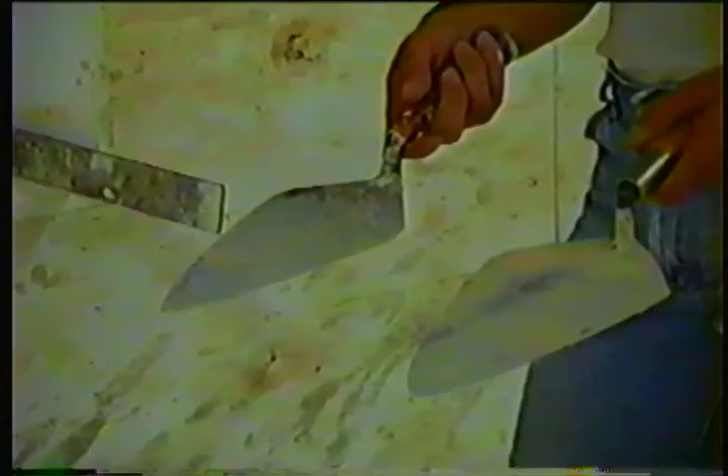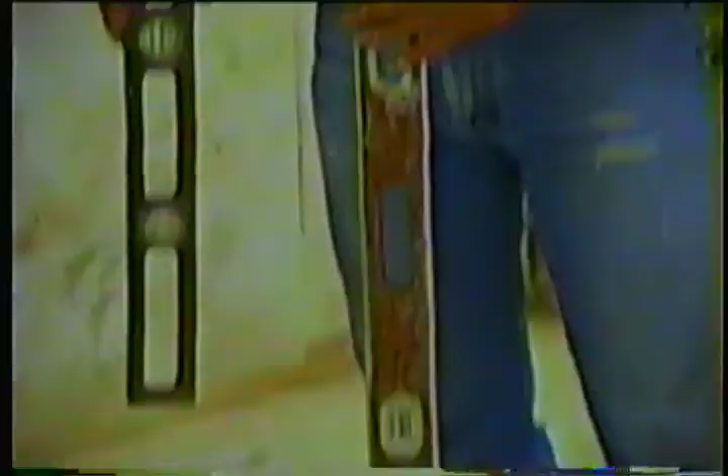We got two trowels. Usually the small trowels are for brick piers, and the big trowels are for blocks. With big blocks, we got to spread a lot of mortar. The next tool will be levels. We have two levels. We have a 2-foot level for small piers, and the 4-foot level will be for corners, block corners. There's a 4-footer, and in his right hand is his 2-footer. In the level is something like alcohol, so it doesn't freeze in the winter time.

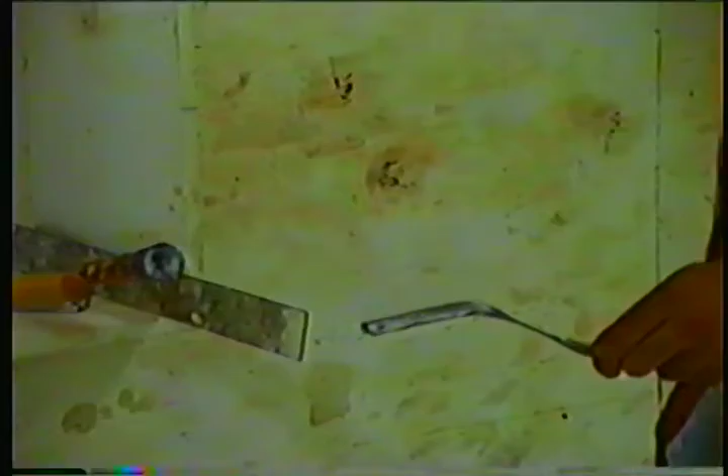The next thing we're going to use is a jointer. This is the basic tool that you should have when you come to the first year. We got a concave jointer. Usually the jointer is used not only to make the cement tight against the brick, but it also waterproofs the brick wall. There's no porous holes in it.

The next one is the rule. Usually every course is 8 inches. That's the modular thing today, 8 inches per course. And of course the bricklayer hammer. This happens to be a smaller hammer, but they have bigger ones.

Okay. And then we have the chisel, or a bolster. Usually it's 4 inches wide, for cutting blocks and brick. It's a very handy tool to have. In fact, you have to have it. And the square: someone would just give you a piece of job to do and say, hey, square that off. Must have a square, which is critical.

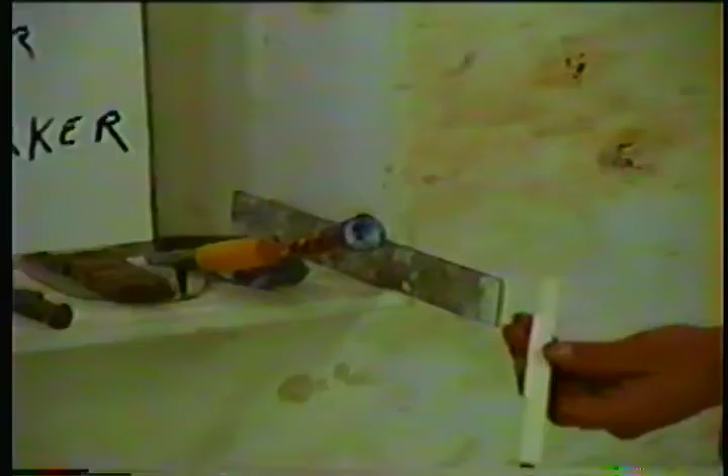And of course, the pencil and the marker. It's good to have a pencil because the foreman says, hey, put a mark on that wall. You ain't going to say to the foreman, do you have a pencil? You got to have a pencil, okay? But that's the basic procedure. Trowel, 2 trowels, levels, jointers, rule, hammer, chisel, square, and a pencil or some kind of marker.

Again, we're going to show you what you're going to do the first year. We'll put you up on a piece of plywood, and you go spread mortar. Okay, Jay. There's a trick to it. Compact the mortar on the trowel so it's nice and compact, and spread. This is a very fancy knack. You can't learn this overnight. It takes a couple of days.

Like I was saying before, that plywood is 4 by 4, 4 feet by 4 feet. You can spread the whole plywood. You're doing pretty good. I bet you if he grabs the big trowel, he might be able to spread the whole 4 foot. Just constantly doing it over again. Compact the mortar, keep the mortar uniform.

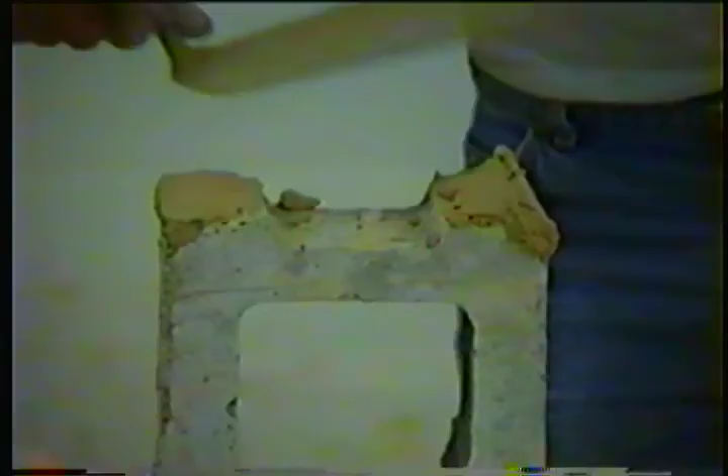See how he pressed that down like that? That's beautiful. Then when he picks up the block, that's beautiful. Look at that. Now when he picks that block up, there's no problem there about that mortar falling off.

Years ago, the old-time bricklayers, they used to pile that ear up so bad it was pathetic. But they wanted full cross joints. Well, we're giving full cross joints here too.

Take your time. See how we cut that down? A couple more times, Jay, then we'll show them how to do 2 ears at once. Save a trip. Every time, every little move means a lot. Every time you got to make a move, you go back to that tub, you're bending over, you're wasting moves.

Now we'll take that off and try it once more, Jay. Look at that. One shot there, one shot there. And compacts it so it don't fall off. Okay, now if you learn that pretty good, Jay's going to proceed now to get enough cement on his trowel. The main thing about learning how to do this is the right amount of cement on the trowel. Not too little and not too much.

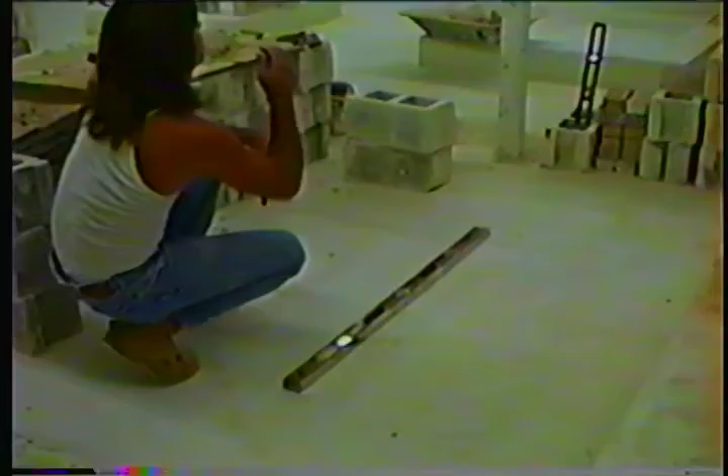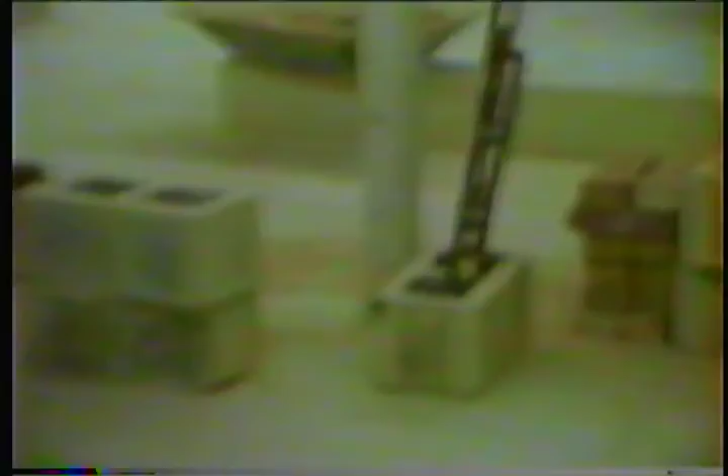Okay, buddy. Now what we're going to do, we're going to make a little pyramid type wall out of 8-inch blocks. Jay has took his level. He's going to put a mark down on the floor. Make it nice and thick. And then he's going to start laying blocks. Notice, fellas, how he put his levels in the block. If you ever had a contest and the judge comes around and sees you with levels on the floor, that's not a very smart move. Always keep your levels in the blocks.

Okay, put the mark down, the pencil mark. Let's see if I can pick that up. And he doesn't put the cement on that mark. He keeps that mark visible at all times. Puts the block down, he's going to level it. Then he's going to plumb it. He's going to plumb it, right? Okay. No. Plumb it up first, and then we get the height. Plumb it up nice.

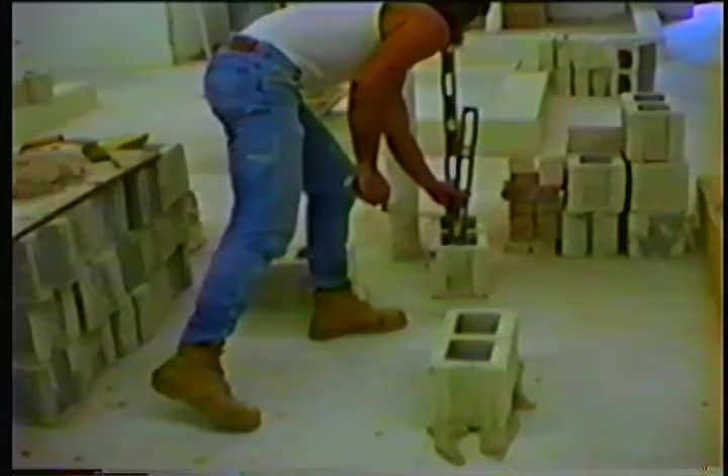Usually they plumb the face of the block, because some of these blocks, or units, whatever you want to call them, they're not perfectly square. But being that he's working on the face of the wall, it's facing him, he plumbs that face of that block. Now you can take the height, Joe. Get the 8 inches from the end, and that's where you take the height all the time, from the end of that block.

Second block. First block is level, plumb. He has his 8 inches. If you notice, we can still see that line. He did not put any mortar on the line. What's the use of putting down the line if you go spread mortar all over it? Sometimes you go on a job and the foreman has a line down already. He says, hey, start laying out these blocks. You don't want to start throwing mortar on the line. My goodness, you do that, you lose the line. Wall look like a banana. You don't want that.

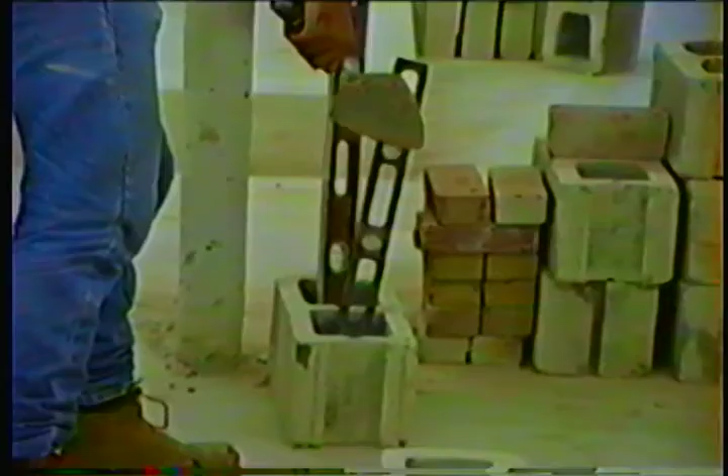Okay, I would use the small level to plumb. Okay, buddy? Always use the small level. It's easier to handle. Does a much better job.

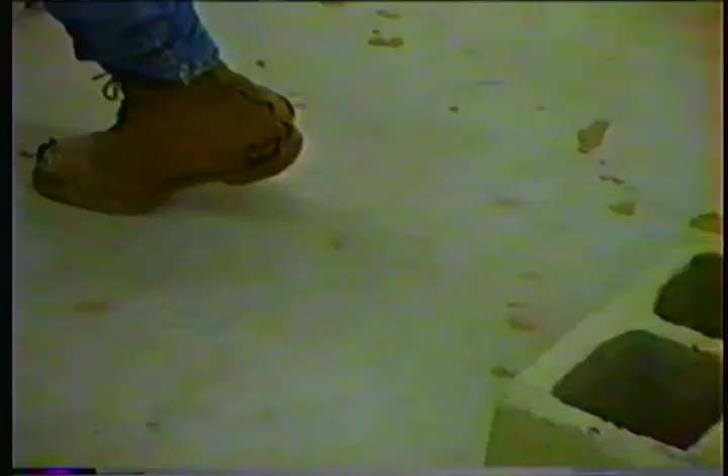By the way, Jay just came to school a couple weeks ago, and he's doing very, very good. Very good. I'm very proud of him. I have hopes for him at a contest in Atlantic City. And by the way, this school always came in the running at a contest. We have good instructors. We have Miss Dione, director of the school, Artie Torrey from Local 13, one hell of an instructor. My partner, Leroy Wilson, you'll see him on tapes later. He's a mathematic genius who shows how to do fractions later on, which is very important for the first year.

Wait, Kai, you want to cut that for a minute? Okay.

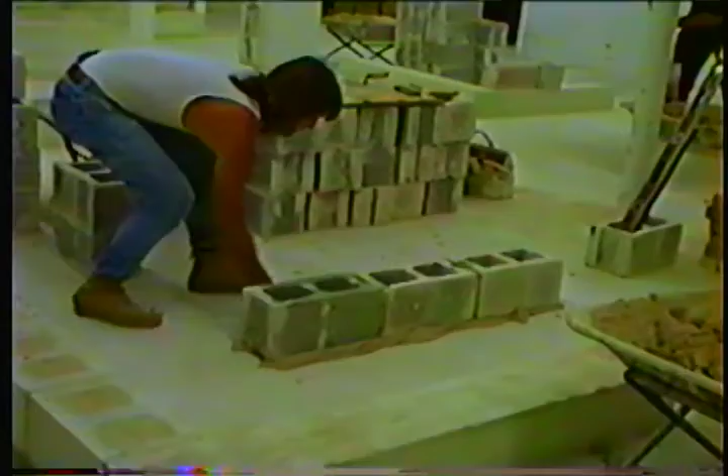You notice, people, Jay is in no hurry to do this project. He is taking his time, and there's no rush. Speed comes automatically. If you think you're going to come into school and do a lot of work real fast, forget about it. You must do it right. Speed comes automatically.

Leveled it. Puts the levels right back in that block again. Comes that block. He ranges them. And fellas, ranging the block is just as important as plumbing it and leveling it. To get that range so all them blocks get flush. And by golly, you look close, you can still see the line on the bottom. Yeah, 7 3/4 from the end.

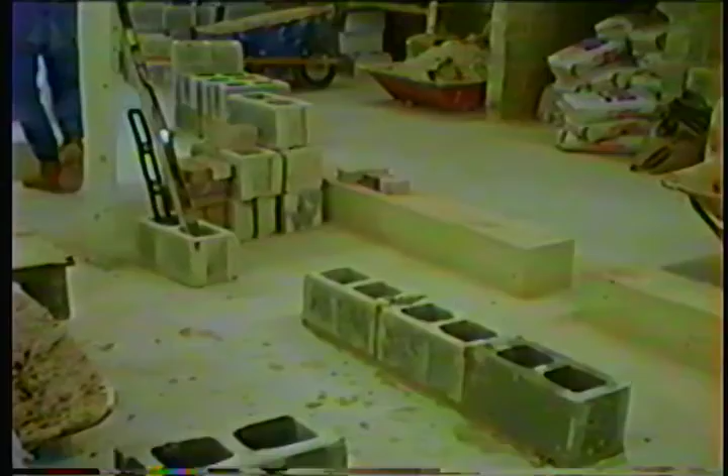Now with these units, blocks are 15 and a half, 15 and 5/8. We're taking the center of that 15 and a half, we're measuring in 7 3/4. 7 3/4 is half of that block. That's what they call half bond. All your bonds, your Flemish bond, your Dutch bond, your stretcher bond, header courses, will come in the second and third year. All we're doing is trying to concentrate on the first year apprentices.

There's all types of brickwork, there's glass block, PG tile.

This is a high-class video. We have a laser here. Never done pretty good without a laser.

So he's getting his mortar just right. If the mortar is too wet or too stiff, forget about it. The mortar has to be just right. If they start mixing up, it becomes too wet, and they can't gain the height. Some of them make it too stiff, they're too high. We'll proceed again, spreading that mortar. Well, you didn't lose too much that time, that's great.

Of course, here we can bend down and pick the mortar up. We're working up 10 stories in the air. You drop that mortar, forget about it. Just putting that block, the second course, right on that mark. 7 3/4 in. That second course would be half bond.

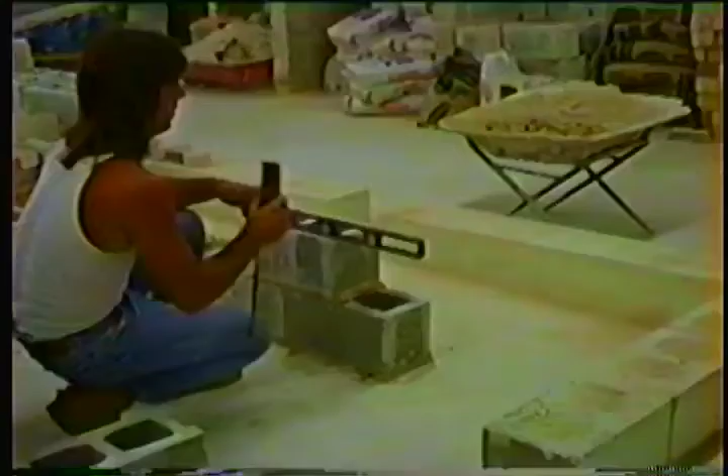Jay, where he wants it, just go. I want you to actually start over there then, right? He's got the height within reason, right, Jay? Yep. Good. 16, right? 16. You got it, buddy.

By the way, Jay is donating his time to come here tonight. I certainly appreciate it. Slept a little bit early before the class came in.

Gotta have a touch for this, fellas. You gotta have a touch for it. It's not easy, okay? It's not easy. You notice that level is facing right on the end. It's not outside or in the middle. It's right facing him on that side, which will be his face work. If you look at the wall, you're going to see the face work. You're not going to see the back of the wall. You're going to see the face of the wall.

On that side up, on the other side up. And range it again. Range it to the other part when you get done. You plumb both ends. You don't have to plumb the middle, just the ends and range it. Now he's checking with the first course, ranging it. Ranging it is very important.

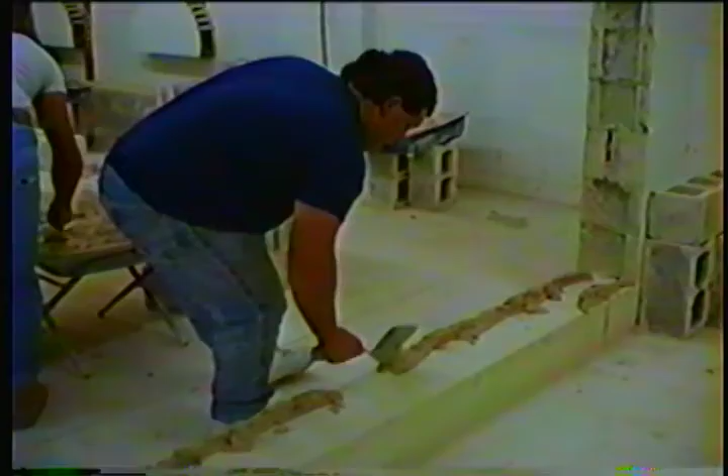So what they're going to do is spread the whole wall, and then they'll start laying blocks together. This procedure is to show you how you work together on the wall. And you notice what a nice job Al's doing. He's not spilling the mortar. Al just started here, about 500 hours, doing great. Again, we'll show you how two men work on the block together.

Jason's setting the blocks. Real fine job. Now, buttering the ears up, helping Jason set the block in the wall. Now, these are 8-inch blocks, so there's usually one man per block on the course. But we're showing you, like if you have 12-inch blocks or 18-inch blocks, quite big today, there's always two men on the block. Again, Al has got his block all set up, and Jason's ready to lay that block. Okay?

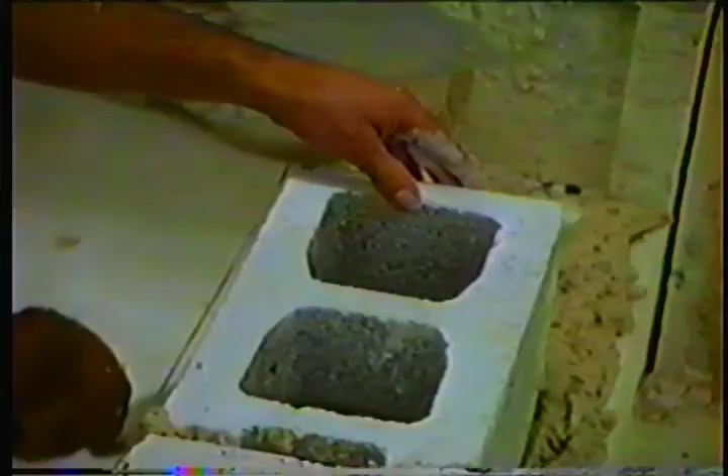Well, Al is getting ready for the other block. Jason's setting that right to the line. Always leave a little space between the line and the block. This way here, you won't crowd the line. There's always supposed to be a thickness of a trowel between the line and the block. Setting up the next block.

Now after one course of blocks are all laid there, we'll proceed to put the line up when he sets this block. Jason raised his line up, and they'll proceed to spread the mortar again.

The mortar should be just tempered right. If it's too wet, it's no good, especially for blocks. The right consistency makes a good bricklayer. Too wet is no good. And too stiff, of course, is no good neither. This seems to be a nice batch of mortar. Spread this line out, and let's proceed to lay the second course.

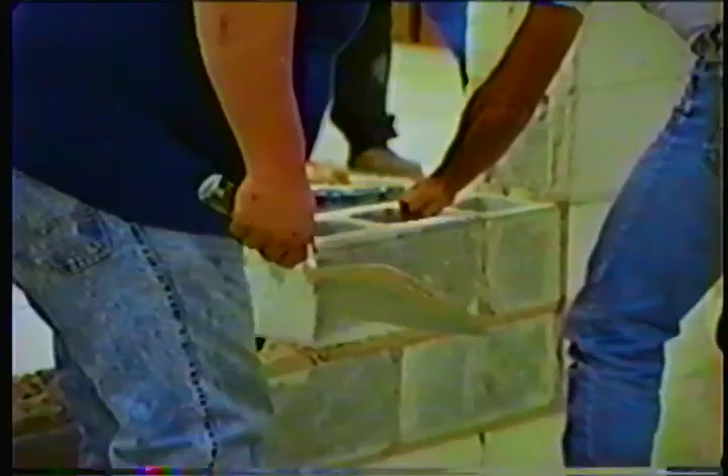Finishing spreading that wall, Jason's already getting ready for the other half. Second course will be a half on it, and while he's doing that, Al will set up another block. Just like clockwork here. No wasted motion. Jason is keeping the block away from the line, about the thickness of the trowel.

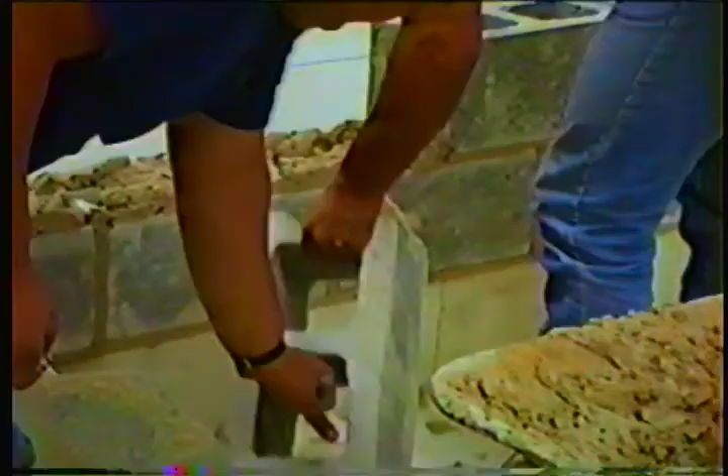It seems every bricklayer knows every move. They don't have to talk. If they want to talk, they can talk, but they haven't said a word. Every bricklayer knows his own move.

Remember earlier we taught you how to butter the ears of the block? Well, instead of doing one ear at a time, Al is pretty good. He's doing 2 ears at once. It wastes, but they save a lot of motion and back bending. The tricks of the trade is to make it easy on yourself. The less bending you do, the easier it's going to be on your back.

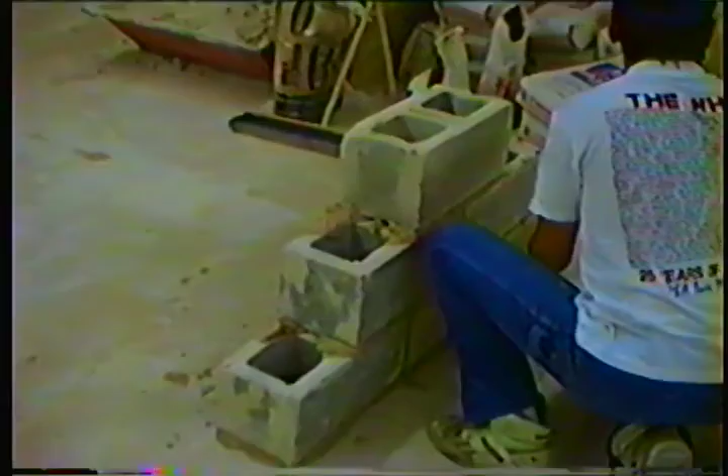Putting another half in, I'll switch around to show you what the other fellows are doing in the class this evening. He's still on the pyramid, he's trying to get it perfect. Practice makes perfect. He'll be a good bricklayer. Jimmy is more experienced than the other fellas, and I put Pat on a 4-inch corner wall, 4-inch block wall in the corner. Little tricky. God bless you there. You got to start over about an 11.5-inch piece.

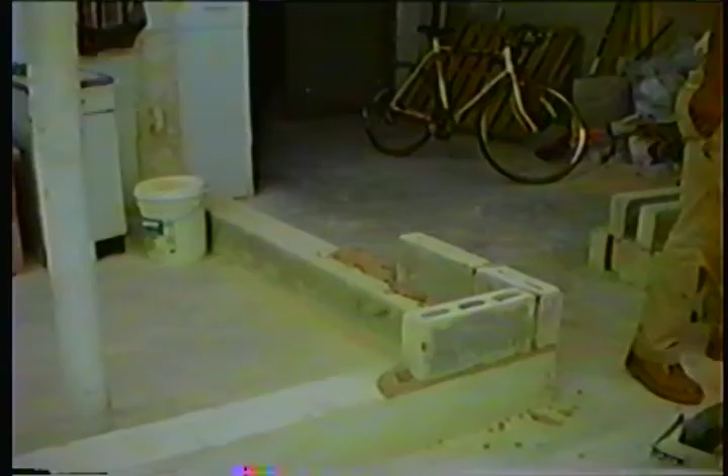Pat just started a couple weeks ago. He's doing great. Now we get somebody else. Again, Mark is putting the line on the right. The man on the right always pulls the line. A little more mortar mix, and Mark and Jason will lay the other course.

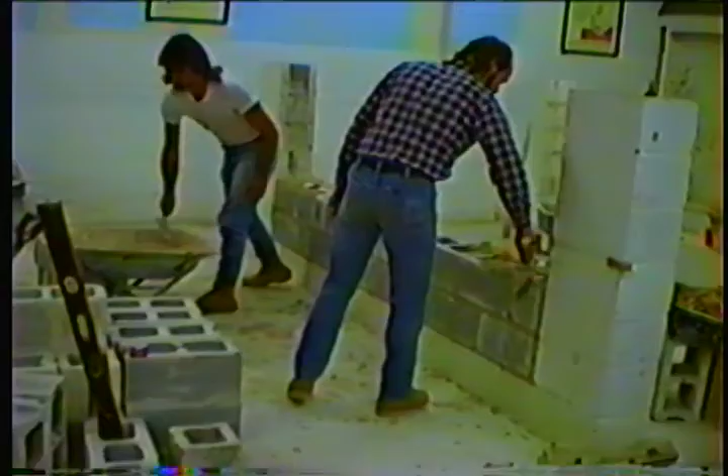Now we'll take a break. Mark and Jason get done with this whole course. We're going to have Mark and Al run up a short corner here. Two men can work on the corner as well as on the line, especially 12-inch blocks. We don't have any 12-inch blocks, so we're just making out that they're 12. The idea is to show you how two men can work together with no confusion, that's the word I was looking for, confusion. Again, Mark spreads on his side, Jason spreads on his side, they come together, and they start laying blocks.

Got the line up. Don't even touch that line. Don't even touch that line. A few weeks ago, trying to get that pyramid through. Practice makes perfect. Again, Mark is driving this time. Mark's on the right, Jason on the left. Mark has been a journeyman about 5, 6, 7 years already. Jason's been laying brick about 4, 5, 6 months, whatever.

This is the first time I handled a video, so I hope it turns out good. Probably need a little more practice in video.

Again, Mark Bassinger is from local 18, and Jason Marino is from local 13. Jason's cleaning up the cement on the floor. So I told you before, fellas, always keep your area nice and clean. If you're at a contest, they don't like mortar all over the floor. The judges. Manipulation of tools. It's all around.

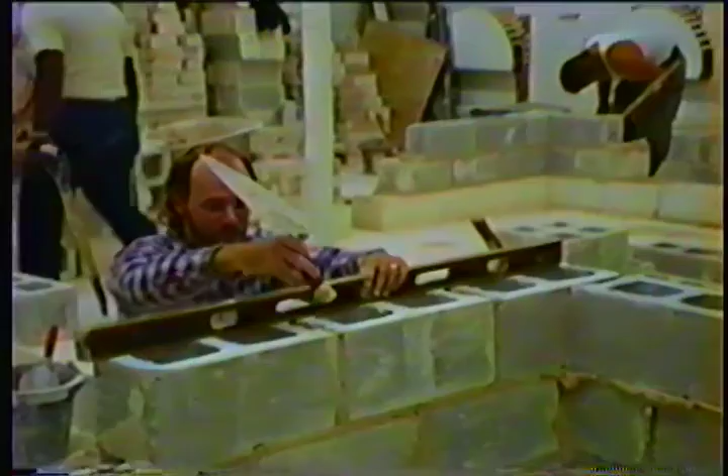Tricks of the trade. Pretty good looking guy, you know me? Look at me. We lie a little bit here, you know. Make it a little bit happy. Make it happy.

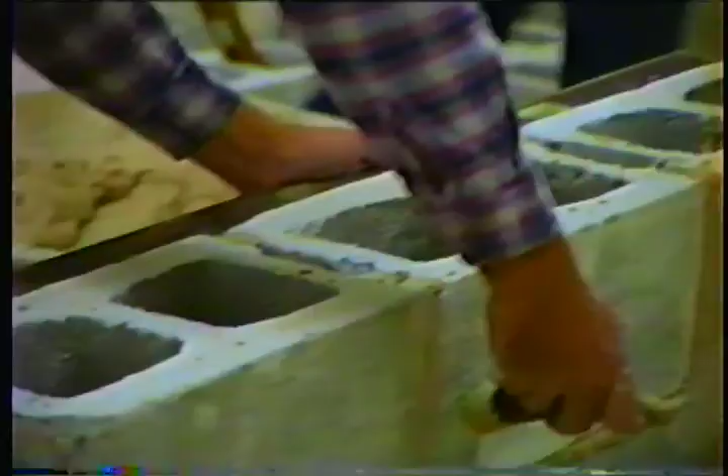The wall is nice and level. Plumbing the corner, the lead, plumbing the lead. When you plumb the lead, you plumb the corner before you go range it, like you're doing now. Always hold the level up in the air, up on top of the block. That's the true grip right there. Okay? Working real good.

Again, Al is leveling his blocks from the corner. I guess he's setting up on Mark. Boy, that's all right. He wants it right. Nothing wrong with that. Then you go range it. Start spreading out for the other course.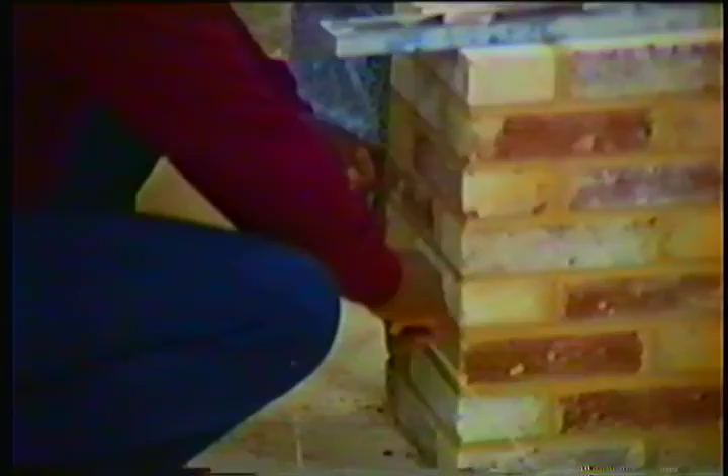Remember, the man on the right always pulls the line. The man on the right always pulls it tight too. Anthony, real tight on the first course. Make it tight. You have about a 60 to 70 pound thrust on that line. I want it real tight. Pulls the line. Hey, quiet on the noise. There's about a 60 pound thrust on that line.

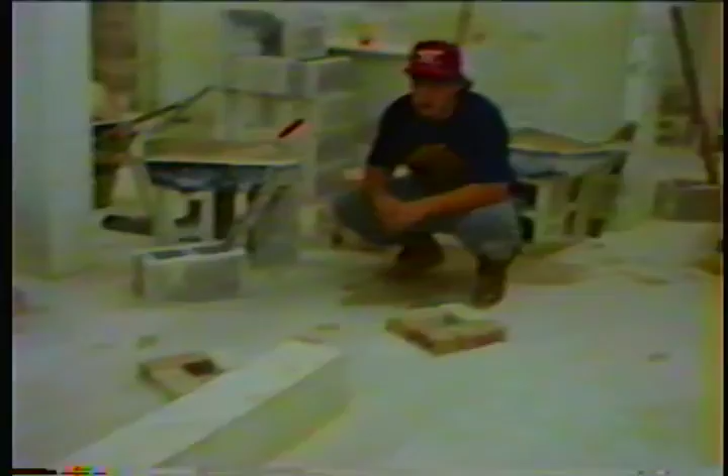Tyrone, you got a line trig? All right. After the line is up, we go set the trig. Patty, you go set the trig for us, okay, buddy? The line is up. The man on the right pulls the line. The trig man will set the trig. After the trig is set, then bricklayers, we lay brick. We do not lay brick until the trig is set. We leveled off the brick, and that should be just level right there. Pat will set the trig, and it's called a trig, people, not a twig. As soon as that trig is set, bricklayers, start laying brick, okay?

Now, let me explain something as we go along here. Start laying brick, Tyrone. I'm going to tell you right now, I'm going to start yelling. I want it done right. Start laying. Do not touch the line. We have 2, 3, 4, 5 people on the line. We do not want to touch the line. Once you lay out the first course, you square the first course away. Square it with a square.

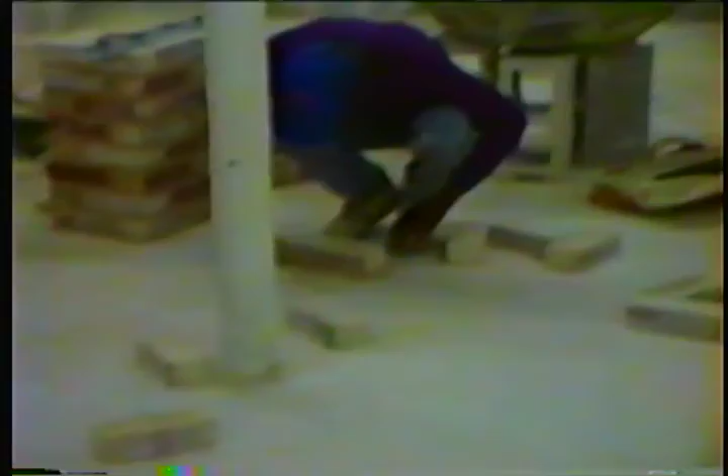Now, get off your knees. Anthony, get off your knees. You're not in church. We're not kidding now. I'm going to criticize you people something fierce. I'm only doing that to show you the proper way to lay brick. You've got 6 of you guys on the line. We do not want to hit the line. If I see a mistake, I'm going to yell out. Stay a trowel's distance away from the line. If you people start hitting the line, you're going to knock out all your people here. You don't want to do that.

Finally got it squared away. Good. The next thing you do, Anthony, is lay the brick to the line. The brick nearest to the line, lay them first. Lay the brick right. You got it, buddy. Lay the brick nearest the line first. Then go back to the brick in back of that.

You lay one on top of that line, you set the trig. You must be 1 brick ahead of the people on the line because you are setting the trig. Don't forget the square. You got a square up here, okay? Square off that first pier. You're doing right. You're leveling it from the line back. Good, Tyrone. Good, Pat, you got the square, square it away.

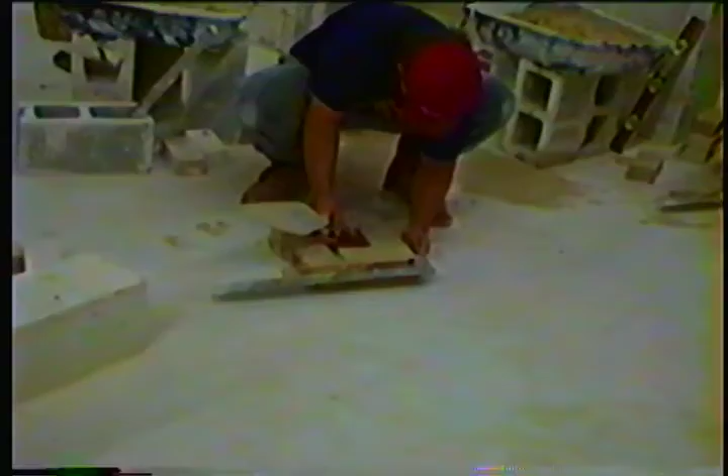Now we're very competitive right now. We're teaching each bricklayer to beat his opponent out. That's part of the game. We don't need lazy people bricklaying, we need hustlers. Very good, Rich. Keep going, I'm talking to the video. Squaring away from the front to the back. The front is already squared away because we have a line on it.

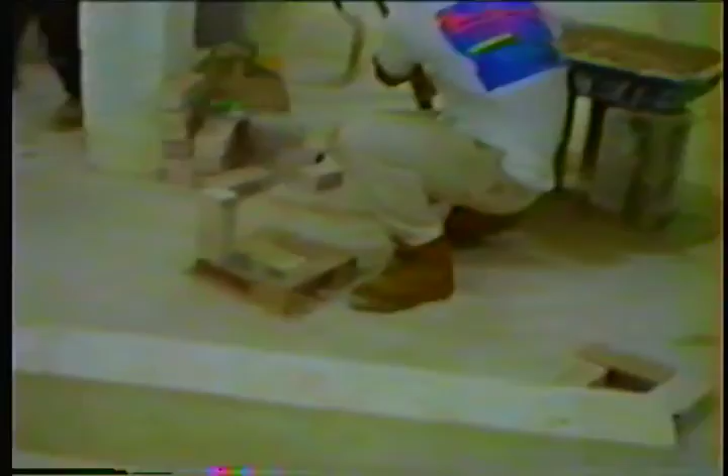What you want, Tyrone? Use mine, Ty. What I'm doing here now, I'm giving you people the bum's rush. In other words, we're trying to make this a competitive affair. I told you from the beginning of the tape, you use a 2-foot level and a 4-foot level. On brick piers, you use a 2-foot level, and that's what we're using now. We're working on the line. We're squaring away the first course according to the line.

Do not spread mortar until the line goes up. Anthony's the only one that didn't lay that last brick. Anthony, lay that brick, buddy. Okay, Anthony will do it. Tyrone is squaring his away. Pat's ready to set the trig up as soon as we call for the line. Robert's throwing the cross joints up, and Richie's throwing all the holes up. Good.

Now you gotta stay up with it this time. Right away, Anthony. We gotta raise the line up, okay? We ain't fooling around with you people. We got to raise the line up. Richie, raise the line up. Roy, raise the line up, buddy. Raise it up, Anthony. Next course.

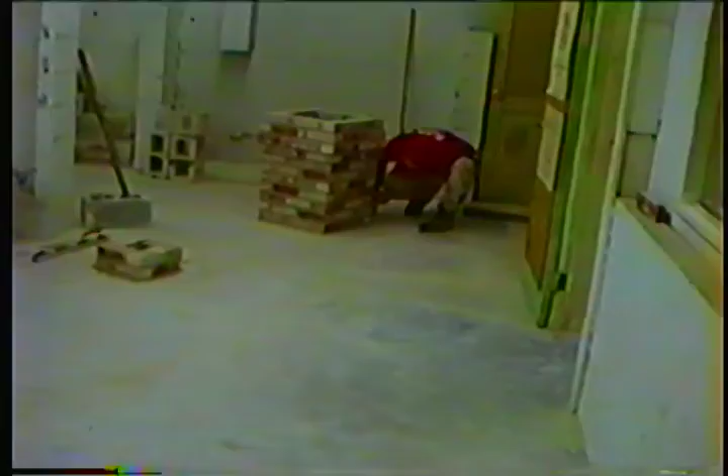Trig set, Pat. Put the line up. Anthony, put the line up. Call down to Richie that you put the line up now. Move the trig up, Pat. Let's go. Move it up. Move the line up, Rich. Thank you very much. The trig is set. We're ready for the 3rd course, gentlemen. The 3rd course. Move it out. What's going on?

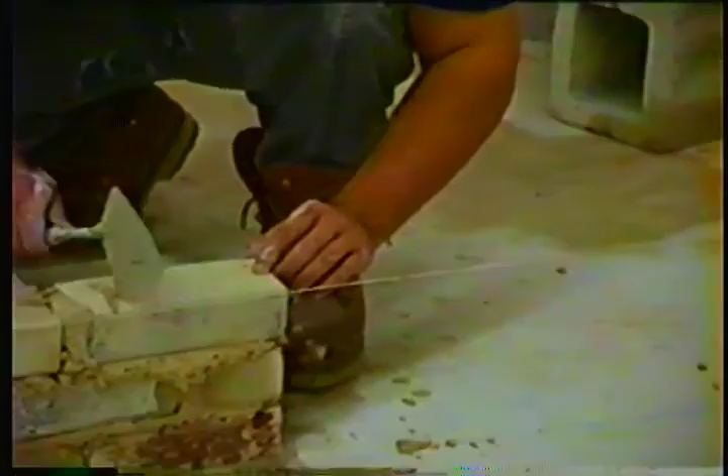Stay away from the line. 1 trowel length away from the line. Good. 1 trowel length away from the line. Let's lay brick, gentlemen. Anthony, let's go. Start the 3rd course, buddy. Fill your cross joints up. You're doing great. You're looking good, gentlemen. Better believe it. You've only been here a couple of times. You can't expect miracles. You're doing great, believe me.

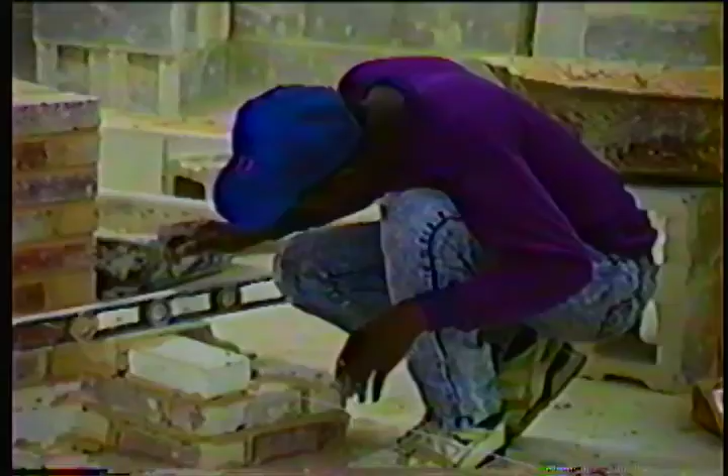Always stay 1 brick ahead on the trig. Beautiful. Just that 1 brick. You call for the line, you put the trig up. Let's go, Tyrone. Pull out, Anthony. Okay, buddy? We're under pressure now, gentlemen. This is how it is. If you don't like it, don't get discouraged. Richie, put that level in your block. Put the level in your block. I tell you that from day 1.

Right. He came in tonight, signed up. He just learned how to spread mortar on that 2x4 again. He's practicing. Sloppy job, but he's getting there. Right from the beginning, people, a bricklayer never takes the trowel out of his hand.

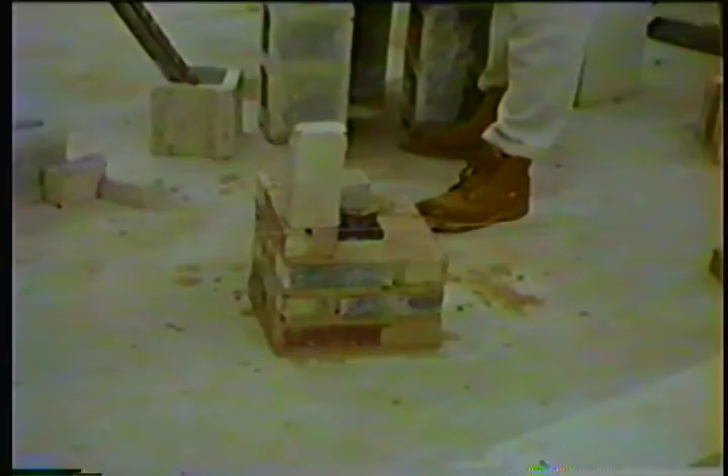Put the line up, Richie. Put the line up. Anthony, put the line up. Pat, remove the trig. Remove the trig and raise it up. Anthony, tell him when you got it up. Good. Good. Raise it up. Richie, is it up? Up. Talk to your opponent over there. Trig set, Pat? Yep. Trig is set. Lay brick, people. Lay brick.

Now. And that's how it is on the job. Under pressure, because you're supposed to be bricklayers. Where's Jake? Jason ain't coming either? No, Jason ain't coming. Jason was just here. Just lay them brick. Stay a trowel away from the line.

And as I said before, and I'm not going to say this no more, we're coming out a couple of times. These guys are terrific. Terrific. Believe me when I tell you, terrific. And by the way, last week, 2 bricklayers built this chimney here. Top of the chimney, corbelling it out. For 8 or 9 times coming to school. Look, check this out. All brick chimney. Real nice. I love it.

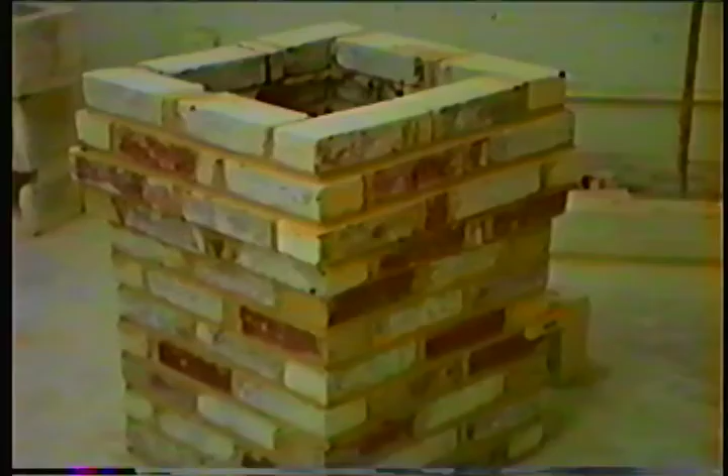Great. Put that last brick in there. Don't look at it. And keep your floor clean. Keep the area clean. Very good, Robert. Let's not work in a lot of mess. Bricklayer's supposed to be neat. Nice and clean.

Very neat, Mo. Pat, move that trig down to your left and set another trig. Right. Get ahead of the line. The trig should always be 1 brick ahead of the line. Don't hit it now, it's too late, buddy. Lay the trig. 28, 12. I can get it for 15. 15 bucks.

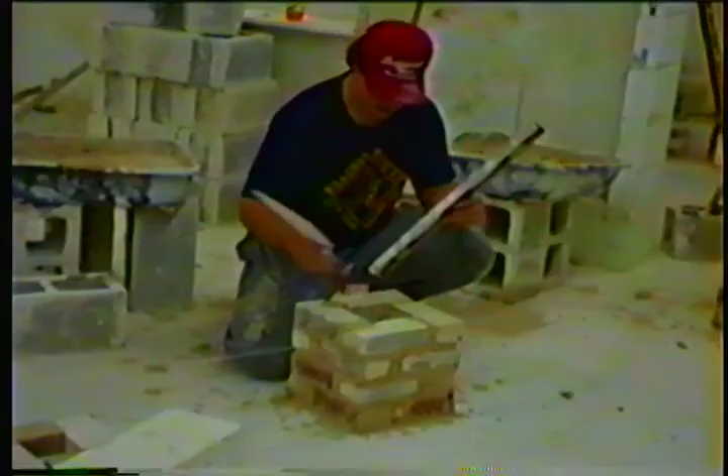Look at that corner. These guys are doing one hell of a good job. I got some bricklayers in this class, I tell you right now. Yeah. Anthony did a heck of a job on that pier there. Anthony D'Antonio, what a bricklayer he's going to be. When you guys get off your vacation, he's going to make you look sick. You guys could never lay up that many bricks on a pier. You watch. Where's Anthony at? Anthony, put your mug here. You ugly bugger, you.

Put the line up. Anthony, put the line up. Raise the trig up, Patty. They're all out. What a crew I got here. What a crew. Yup, Richie. What's up? Tell your partner, yell down there, say, partner, I'm up, buddy.

Holes in his pier. Tyrone ain't got no holes. Anthony ain't got no holes. Robin ain't got no holes. Uh-oh. Pull them holes up, Richie. Good. Trowel away from the line. Tyrone. You got it. Yeah. Either that one or that one? Oh, that was saying. That's what that was saying.

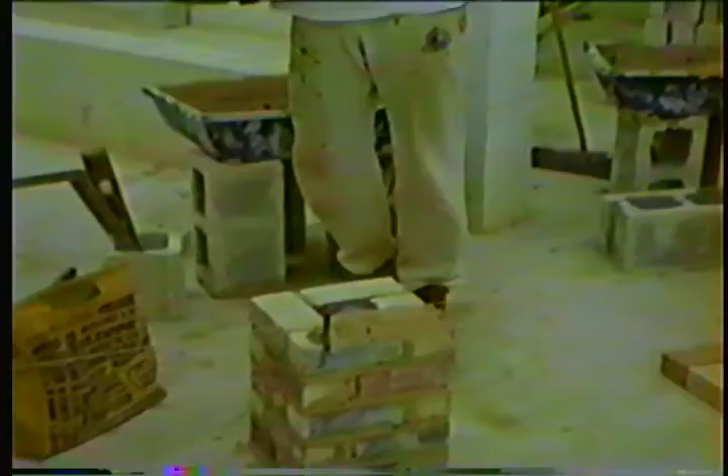Get the line up. Put the line up, Richie. Anthony says, put the line up. Drop the trig, Pat. Put the trig up. Let's go, Anthony. You asked for it, baby. Put the line up. You asked for it. What a bunch of crumbs. Set the trig, Pat. Set the trig. I'm going to pass. You ain't up there yet. That's why I told you before. 3 times. I said, Pat, lay the brick on the line first.

This is what I mean. Now you're in the hole. Now we'll see how smart you are next time. There, the trig is up. Now you can lay pipe. Lay brick. Well, pipe, brick, the same thing. Let's go. Lay 'em up. Plumb that now. Pat, you rushed me. Don't foul up my bricklaying now, Patty. You rushed me. I didn't even level. Yeah, rushing you. I told you.

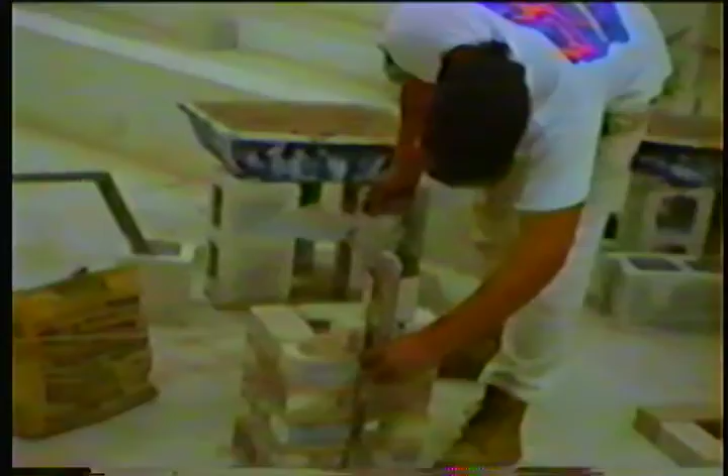Now let's see how smart you are. Lay the brick to the line first. Don't plumb the middle. Plumb the end and range it. Pat, plumb the end, the corner, and range it. You don't have to plumb in the middle up here. Boy, oh boy, oh boy. Lucky I can't talk. Time. I'll be swearing at you guys. Time. I ran out of brick. Time.

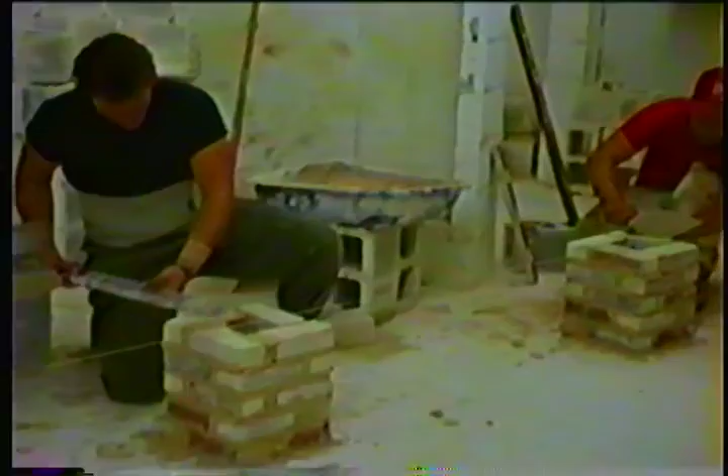All right, Anthony's kneeling down because he hurt his back. Yeah. You win some or lose some. That's it, Tyrone. Lay them brick. Put Pat in the hole there. Oh, we're on the other course. You're like an old lady there. Let's go, boy. Yeah, I just told him. Let's go. Never mind. Correcting anybody's work.

Lay the brick. Marie wants a house built out of brick, right, Marie? The three little pigs. The guy was smart. He had a house out of brick. He didn't build out of straw or wooden stick. He built out of brick. The guy wasn't stupid, that little pig.

Lay him, Tyrone. Good boy. Good boy. Lay them suckers. Puppy dog. Right over. Thank you, Pat. Thank you very much. And you only been out of 45 minutes.

Pat, we're all getting paid for this? Pardon? You getting paid for this? I didn't hear you. Are we all getting paid? I said I'm giving you each a tape, didn't I? Who's paying for it? Me. No, you're not. Yes, I am. I'll go for it. Get the cup. This will be a remembrance from me, okay? You know, I tell you what, fellas, I don't want to brag, but if I was a videotape man, which I'm a videotape man, if I was good as a bricklayer, this would be perfect.

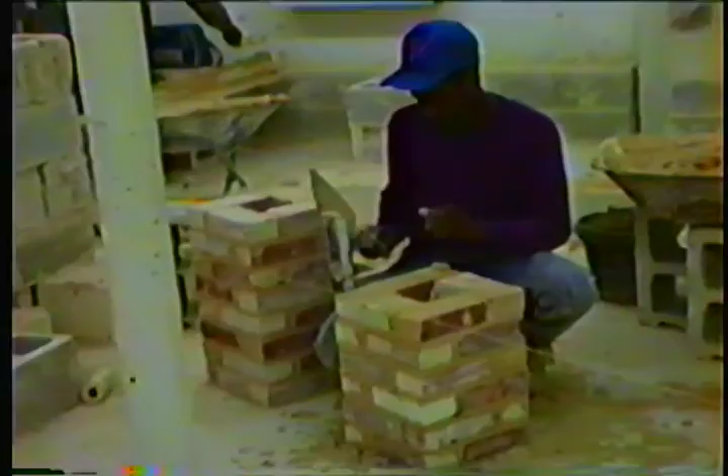Set the trig, get the height, plumb it up, put it up there. Akins is a company man, I know he is. Put the line up, buddy. Put it up, put the trig up, Pat. Put it up, Robert. That's the last one, huh? This will be the last course, gentlemen. After this, Leroy will show us about fractions downstairs on the blackboard. And I said at the beginning of the tape, he's a mathematical genius. And he's pretty damn good. He'll teach us fractions.

Let this be the last course, okay? All right, Bob. Anthony, why did you drop the trowel out of your hand? I just got done telling the people on video, a bricklayer never drops his trowel, and here you dropped your trowel. I was gonna let it go, that's why. No way, Jose. If Artie Torrey was here, he'll tell you. All right, make me look bad. A bricklayer never drops his trowel, right, Tyrone?

Well, I'll tell you what, fellas, I'm very proud of you. You worked on a little pressure here tonight, and he shows you different tools. He shows you how two men can work on a block. He showed you how two men can build a corner. Now we're showing them how bricklayers can work on the line together without hitting the line out. I worked on Merck's down in Rahway. There was 20 piers. There was 20 bricklayers on the pier. And them piers went up beautiful. Nobody ever hit the line out. You gotta tap it down. Right. Practice makes perfect.

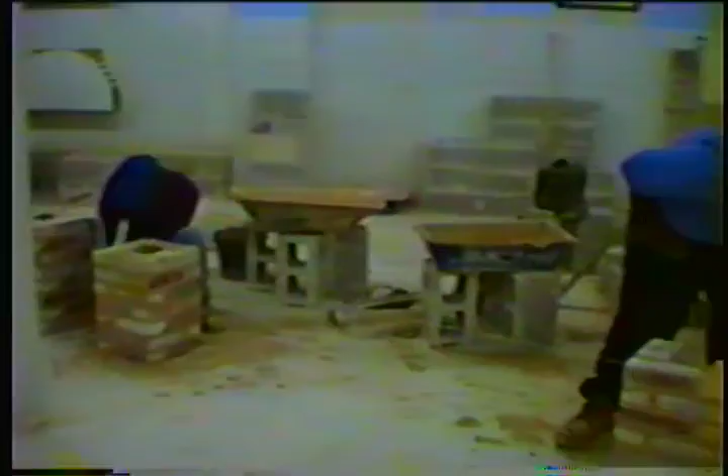I don't know what Leroy told him, but now he wants the line all the time. You look at the kid. Tyrone, you want the line too. Another company man. You got a lot of company men here. Lay him in there, Robert. I'm very proud of you guys, believe me. Very proud. What we'll do now, we'll go cut this off. And Leroy Wilson, number 13, will show us how to do fractions. And that's about it in this video.

You gotta know a little bit about the ruler and fractions first year. It's only the practical experience and little fundamentals about fractions, okay?

I don't consider myself a professional video taker, or what do you want to call it, cameraman. But I think we pulled up here. And I want to thank the corporators: Richard Coons, Robert, Tyrone, Anthony, and of course, Anthony D'Antonio, who just left for the back end.

He still had to come to school. I think he fell off the building 10 stories. Didn't he say, Leroy? How many stories did he fall off? 10 stories? He hurt his back. He got up and walked away from it. We were lucky. Huh?

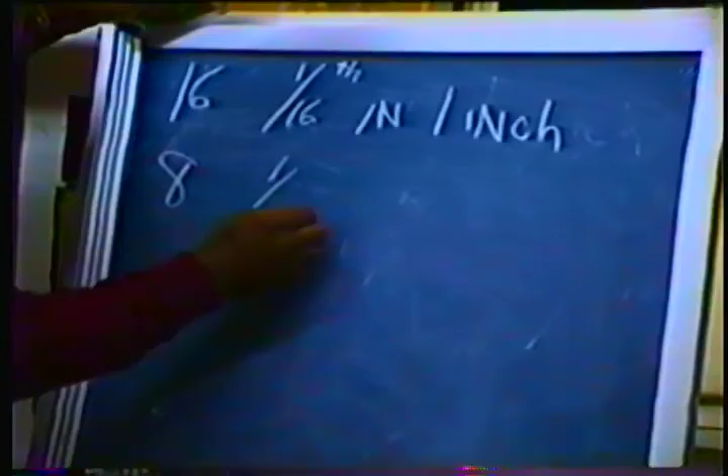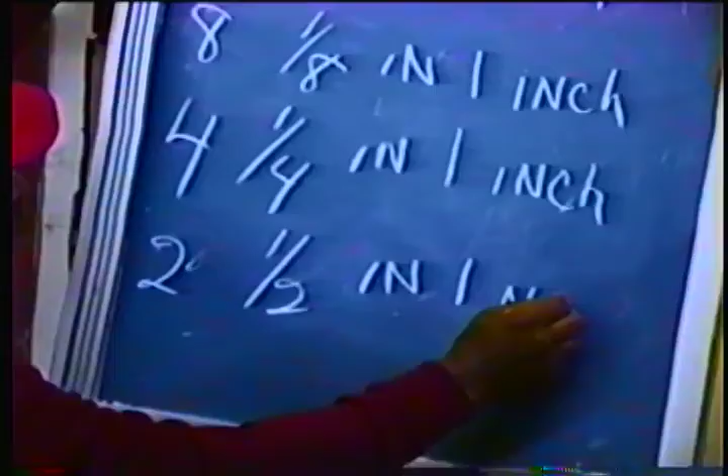There are 16 1/16 in 1 inch. Of an inch, there's 16 of them in 1 inch. Good. There are 8 1/8 in 1 inch. 8/8 to 1 inch. 4/4 to 1 inch. And what we have here, fellas, so you know the ruler.

There's 1/16 of an inch. There's 16 of them in 1 inch. There's 8 1/8 of an inch in 1 inch. There is 4 1/4 of an inch in 1 inch. There's 2 1/2 inch in 1. You got it.

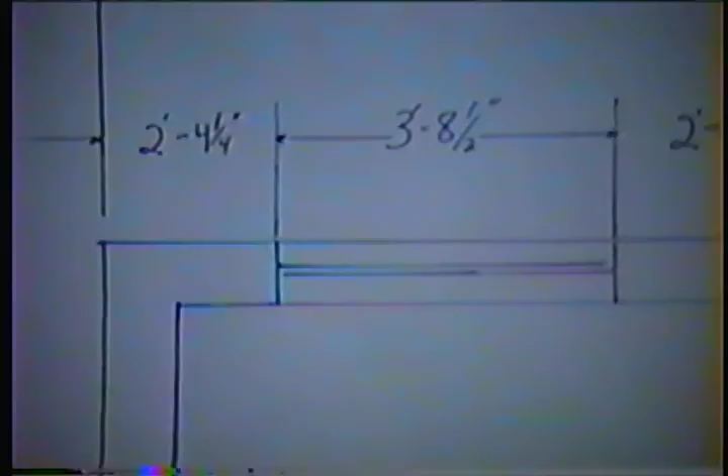This diagram will show you the importance of knowing fractions. Here you have a simple diagram of probably a foundation with 3 openings. Now, if the architect did not give you the measurement from here to here, you have to figure it out

by these fractions. You see a fraction 2 feet 4 1/4 inch, 3 feet 8 1/2 inch, 2 feet 4 3/8 inch, 3 feet 4 1/4 inch, 2 feet 4 3/8 inch, 3 feet 8 1/2 inch, 2 feet 8 1/4 inch. Now, to get the overall measurement from here to here, see the question mark here, you have to add these fractions up.

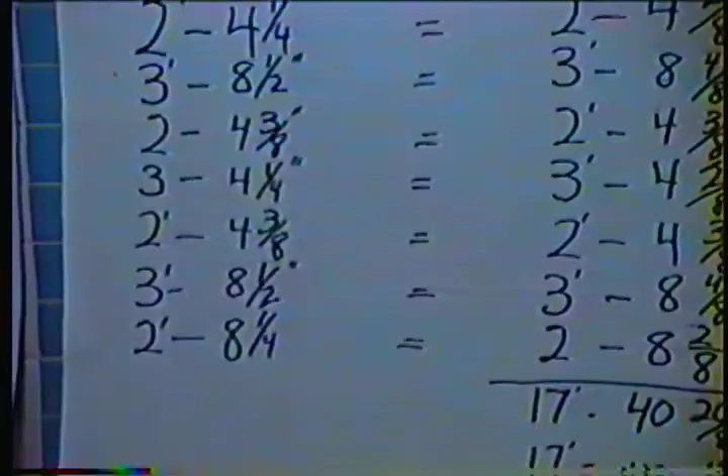On the next diagram, we see these measurements have been placed on this sheet. You see the measurements that are called out, the 2 and 4 1/4, 3, 8 1/2, and so on. Well, to figure out these measurements, you have to change these fractions. First thing you have to do is find the common denominator. The common denominator for these will be 8. You see it's over here. All you do, this will equal this, and so on.

This will equal this. Since you change the least common denominator to 8, 4 into 8 will go 2 times. 2 times 1 is 2. This is how you get this number. Same thing here. 2 into 8 will go 4 times. 4 times 1 is 4. That's how you get this number. 8 into 8 1 time. 1 times 3 is 3.

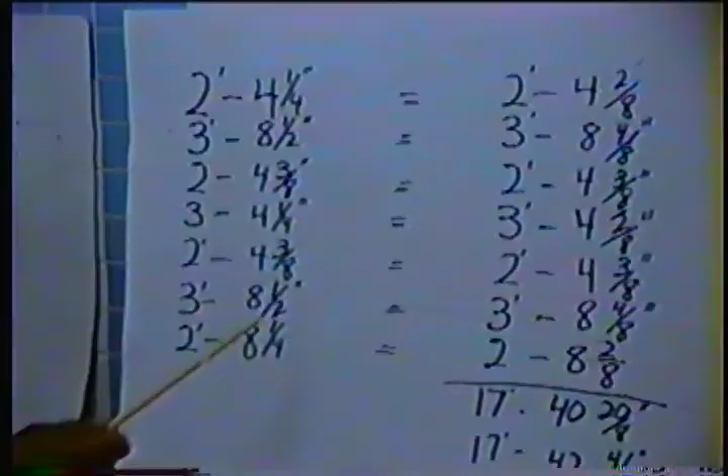4 into 8 2 times. 2 times 1 is 2. 8 into 8 1 time. 1 times 3 is 3. 2 into 8 4 times. 4 times 1 is 4. 4 into 8 2 times. 2 times 1 is 2. This equals this. Now you come to adding up these numbers.

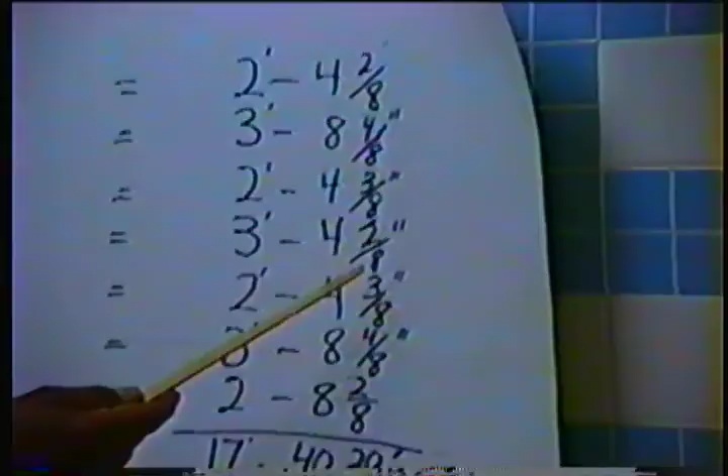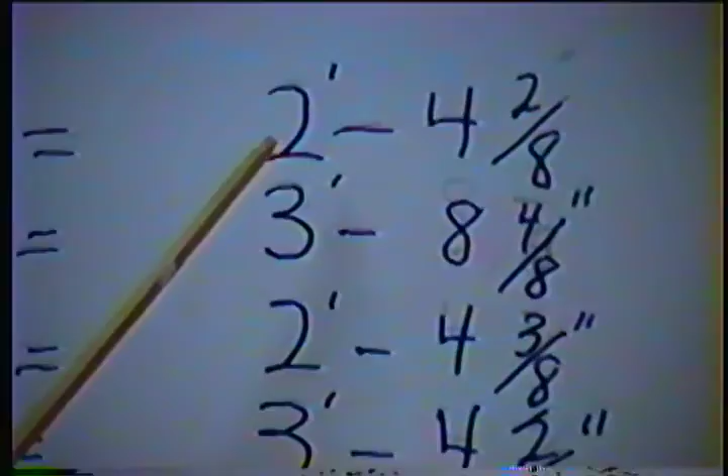Okay. You have 2, 6, 9, 11, 14, 18, and 2 is 20. You have 20 over 8. And here you have 8, 8, 16, 20, 24, 28, 36, 4 is 40. You have 40 here. Then you have 2, 5, 7, 10, 12, 15, 17. You have 17 feet, 40 and 20 over 8 inches.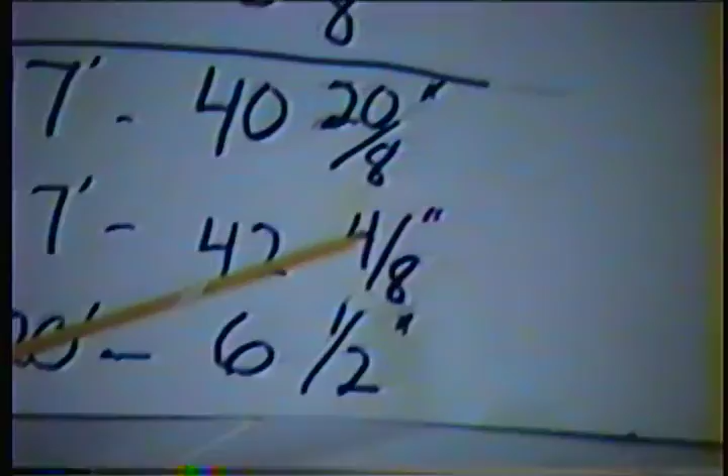Now you have to change the fractions into inches. Here, first you change this fraction into inches. How you do that is by dividing 8 into 20. 8 into 20 will go 2 times with 4 over. You take the 2 and you add it to this 40. Now you have 42 inches, 4 over 8. 42 4/8 inches. You keep the 17.

Now you change these inches into feet. And how you do that? You divide these inches by 12 inches. You divide 12 into 42, you get 3 times. You take that 3 and you add it to the 17, you get 20. That leaves 6 over. Now you reduce this fraction. 4 into 4 1 time, 4 into 8 2 times. The overall measurement for this is 20 feet 6 1/2 inches.

Now you see the importance in knowing fractions. The overall measurement from here to here is 20 feet, 6.5 inches.

Now, wait a minute now. Very good, Raymond. Raymond, listen to me. Right. Gotta put that out. But I'm not in it, so it's not in there. Let me just get a better shot of that now, wait. I took my hand off the button when I spoke, so that was good.

6.5 inches is the overall dimensions of this room. Very good. Again, let me bring out the fact that these fellas started, this will be their 15th session in school.

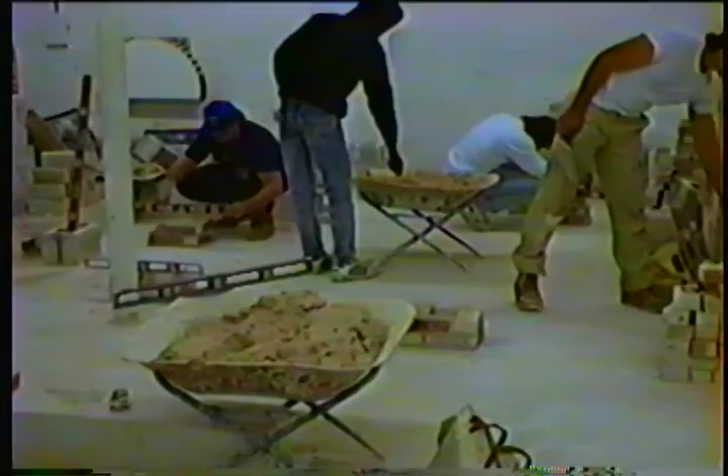Tonight, we're having a mini contest, so when they get into a contest, they just know how to handle themselves. There's no talking here. And I have the other instructors that come up; one is going to be the judge tonight. They're really putting their heart into this. Breaking them in, so when they do go to a contest, they'll certainly know what to do, what to expect at a contest. And I tell you one thing right now, people, 15 times they came to the school, and they're doing very, very good.

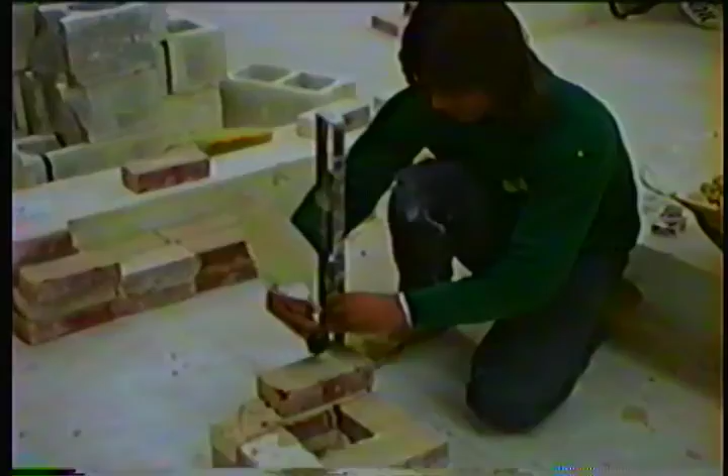Here's my buddy Jason. I don't know how he gets them black eyes. He must be fighting a lot, huh, Jay? There's Richie over there. They're all sincere people here. There's Patty. There's Anthony Akins, Robert. Anthony D'Antonio. Last time Anthony was here, remember he had a brace on his back. What? No, I said the last time you were here, Anthony, you had a brace on your back. And you still wanted to lay brick that night. Conscientious bricklayer.

By the way, the other instructors came in tonight on their own time to be a judge. I think that's beautiful. My buddy Leroy, my helper, my instructor there. Leroy's all right. We have to set a time limit of about an hour and a half on this project. We'll let them know like 10 minutes before time to strike up with their work. And then the other instructors will be the judge. Mr. Ione, he teaches the 4th year, and Artie teaches the 2nd and 3rd year.

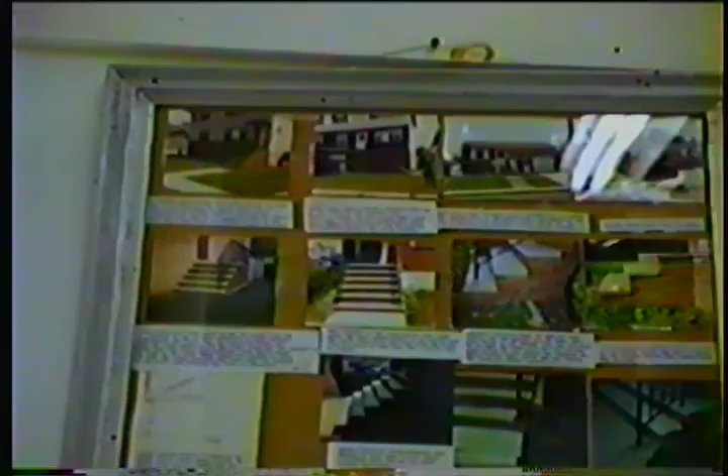Taught them how to lay steps, how to lay out steps. And there should be more work along houses. But they say a lot of houses are non-union. No. If our people don't know how to lay out brick steps or build fireplaces, how come the non-union people can do it? And yet, I teach them that, how to lay out bricks. Different bricks, different heights, different steps.

Put in a frame, they come, they can read anything they want. Here's a brick step. The guy, instead of having 2 bricks in the stone on the first step, he had 1 brick in the stone. You notice when he comes out the door, he comes right on the platform, the right height. You better come up to the platform with the right height. This is approximately 4 inches to 6 and no more coming out the door. All that's on that frame. Brick step glass, self-explanatory.

Have another frame of laying acid brick. The chemical plants. Working for Chiola Brothers in Elizabeth. Be surprised at the condition of the bricklaying. Here's Anthony down in the pit with a mask on and a white uniform on. They don't get contaminated. Big plant, laying fire brick in a hole. In a pit. There's a pit, another pit. Look at that pipe. I don't know how Anthony did it. He got behind that pipe there. Good work. Good work.

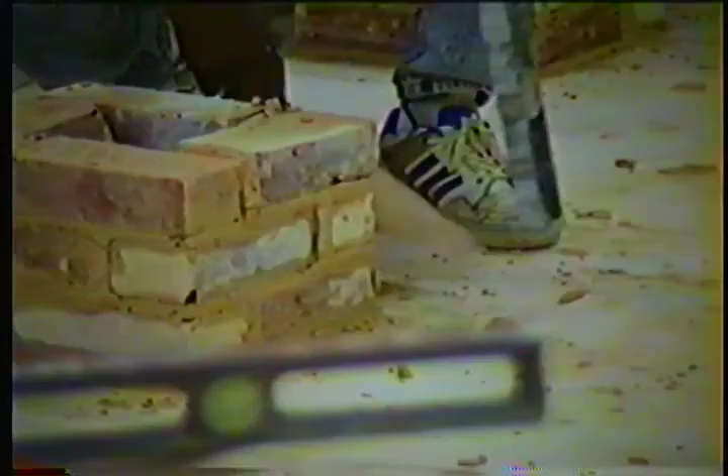I've always learned the business as a competitive business. I consider myself a fairly decent bricklayer, but I tell you what, I met some good ones out there. Put me to shame. And that's what we're doing here tonight. We're trying to make this a competitive business. I don't look at brick piers, I look at money piers.

Buddy Leroy, a real gentleman, who's picking his nose. Leroy, don't do that. Good guy. Good instructor and a good man. Still at it. Still at it.

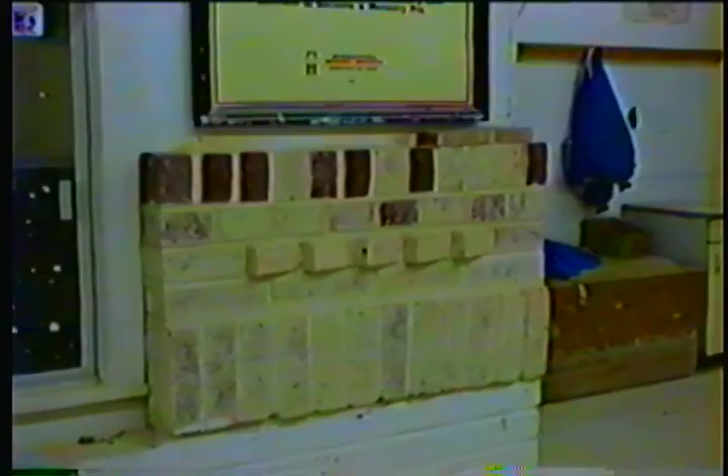So let's do this little paneling here. Soldier course, stretcher course, the sawtooth course, which you'll see up on parapet walls of these old buildings. They don't do that brickwork today. Sawtooth courses for decoration purposes. And the next one after that is the header course, and of course, the rowlock. It's a nice little project. It took the kid about 6 hours, but it's nice.

Some fellas don't even have a car, they come on a bike. I think he comes 5 miles. I give that boy a lot of credit.

We're about 45 minutes into the contest already, and look, Jay laid about 18 brick there. That ain't bad. That ain't bad. If he was to work 8 hours a night, no doubt in my mind, he probably could build about 2 4-foot high piers in 8 hours. That's a lot of plumbing for them piers, a lot of plumbing. Consuming time here. Not like laying block. Again, I say, it's a very competitive business. And I met some good bricklayers out there.

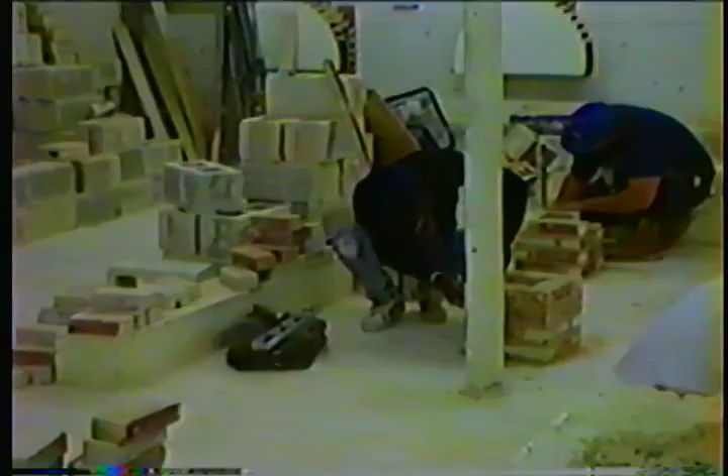He told me his name was John. Hey fellas, you got 10 minutes, right? Okay, yeah, cut. He told me that, I don't know what to do. I'll do it like that.

We finished up the contest there. The fellows left the room, and the instructors will judge their work and give them a mark accordingly. So, 5.5. No. It's 0.5 times 5. Yeah, 2.5. Because we should have. He doesn't have the heights. They get 0 on height.

I guess we have level, right? Level. Plumb and neatness. Level is all right. How many points we get for level? 3? Production and plumbing are 3. The rest are all 1. Okay, he's off here. He's off at 3, so you gotta give him half. Yeah, so it'll be 1.5.

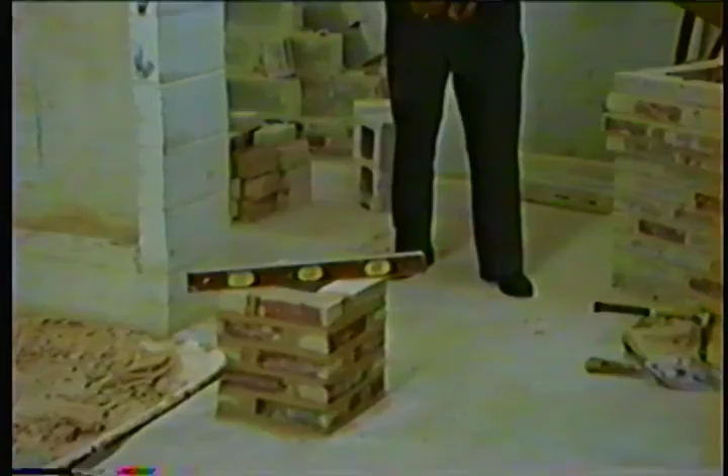Yeah, 1.5. Neatness, Bill? Neatness, no, he's not neat at all. I give him 0 on neatness. Okay. Now, manipulation of tools. Well, we don't have manipulation down here, son. Oh, all right, let's not. We only had that one fellow who was hitting his level that I saw. So if it's not... Okay, he's got his heights.

That doesn't have his level, he's off here. So give him half, because most of it he's already. Half on the level? Yeah, give him half on the level. Bond, he's all right. And production? Production, he has 1, 2, 3, 4, 5, 6, so he gets 3. How much do we have for neatness? 1? So give him half, make these joints look neat. How about Cosmo? That's the only one we're missing.

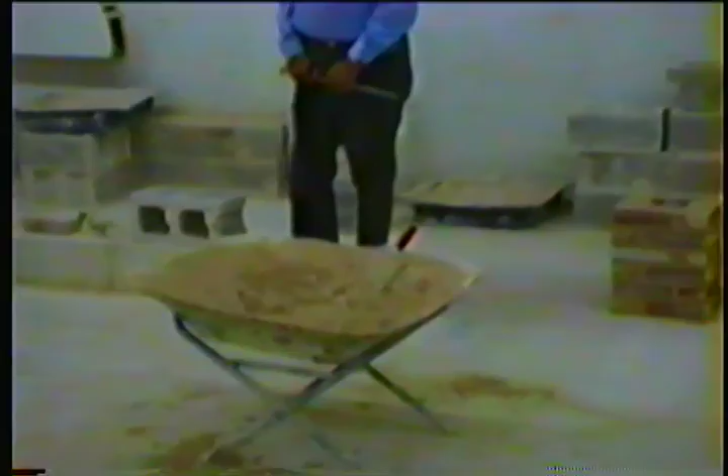Okay. You got these, you don't have the heights. Doesn't have height. Where's this guy's? That's all. All right, so give him half on the level? Yeah.

I judge you hard to be critical of you. And later, if we want to talk about them after, I can tell you where you're wrong and why, and probably some of the things that you can let fly on the job. But we're going to be very hard because it's better for us to holler at you so you don't get fired. Okay. I don't know the names, so we're going by numbers.